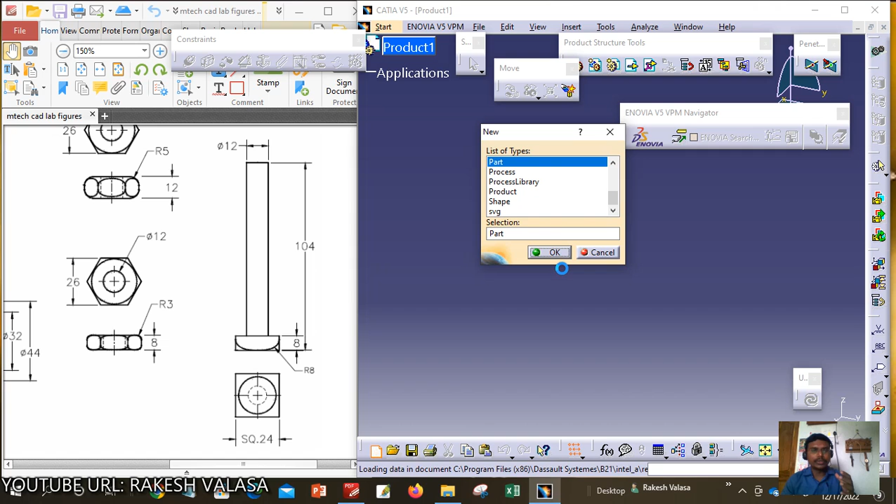Okay, let us start with CATIA V5 software file. Let us open a new CATIA file. From the list of types, you can choose part, then click OK. Now the new part drawing is activated. On the left side, it's showing different types of planes. Among these planes, now I'm choosing the XY plane.

XY plane shows top view of the given part. Now I'm going to choose XY plane. First I'm going to construct this bolt. You can see here at the bottom we have a rectangle, a square. The square dimensions are 24 mm. So I am choosing XY plane, then click on sketch tool. Now the isometric plane is converted into orthographic plane. When you click on sketch tool, the 2D tools are activated.

From the profile toolbar, I am choosing center rectangle. Now apply the dimensions. This is the square bolt, so all dimensions are equal. This length is 24. Next, again give the dimension to this side. This is also 24. Then click OK.

Now exit from this workbench. This square width is 8 mm. With the help of pad tool, apply the width. The width is 8 mm. Then click OK.

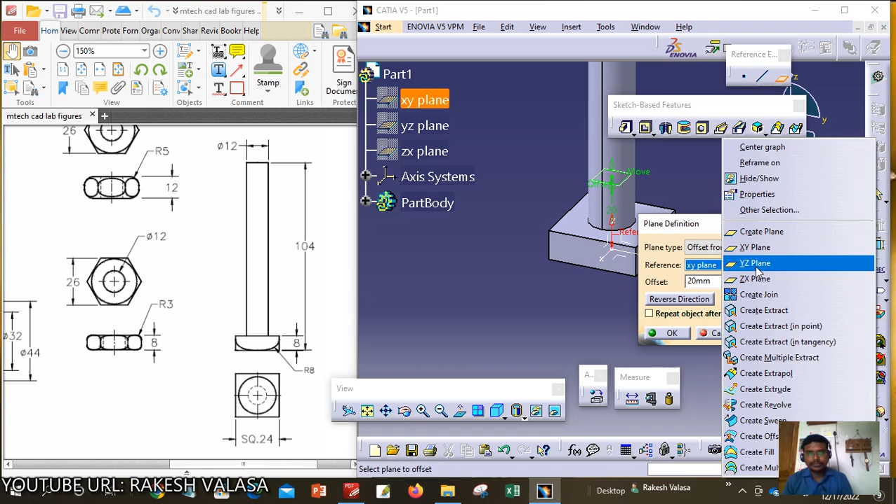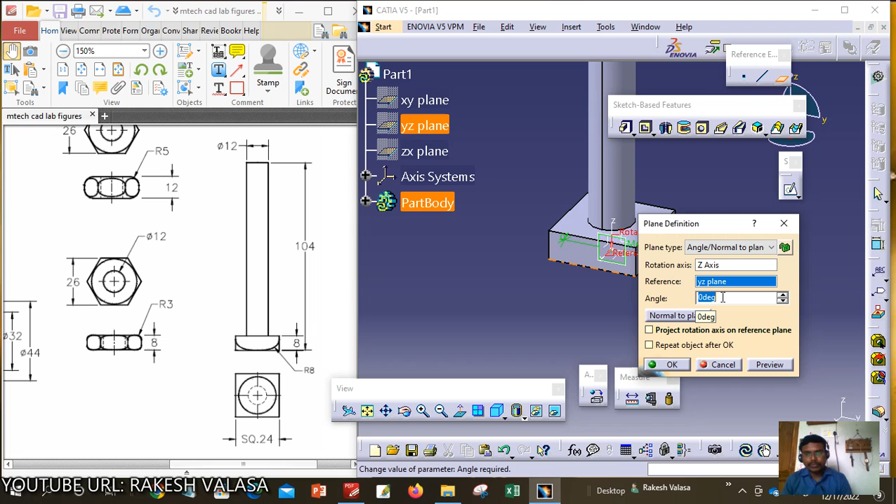I'm choosing YZ plane. Next, from plane type, here I am choosing angle or normal to plane, because this profile appears with rotation with the Z axis. The rotation angle is 45 degrees. This square solid is equally inclined to this surface, so that's why I am entering that angle as 45 degrees. 4-5, enter, then click OK.

On that plane we need to create this type of profile. So for the sketch tool, I am choosing position sketch. Here I am choosing this plane, then click OK. You can see here, in the previous step when creating the plane, that plane is parallel to YZ plane. When you are choosing plane type angle/normal to plane with respect to Z axis and adding the angle, that plane becomes parallel to that surface.

Okay, on that plane I am going to construct this type of profile. Now I'm going to create this profile on this surface. For that purpose, I'm going to project these two sides with the help of project 3D element, this edge and this vertical edge. Now I'm going to construct this profile with the help of the profile tool. When you choose the profile tool, it shows three different options. In that three options, I am choosing 3-point arc. This edge is the first point, second point, and this is the end point. Then click OK, then click Escape.

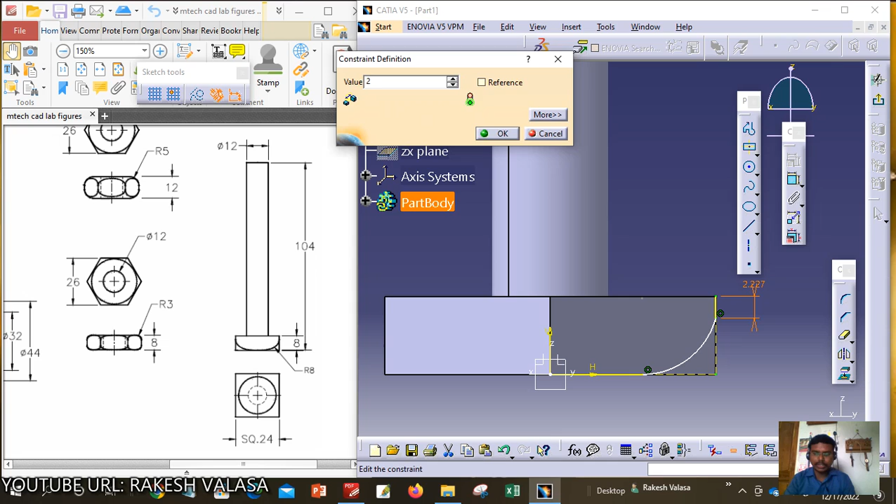Now give the dimension for the remaining length with the help of the constraint tool. This is the starting point, this edge. Let us assume this length is 2 mm. Then click OK. Now give the dimension to this radius. The curve radius is 8 mm. Select this radius, now change the dimension to 8 mm. For full constraint, you need to coincide this radius center point and this edge.

This circle, this radius center point and this edge—a small distance is there, so you can click the mouse right button, then choose coincide. Now this arc, our curve, is fully constrained with respect to this edge.

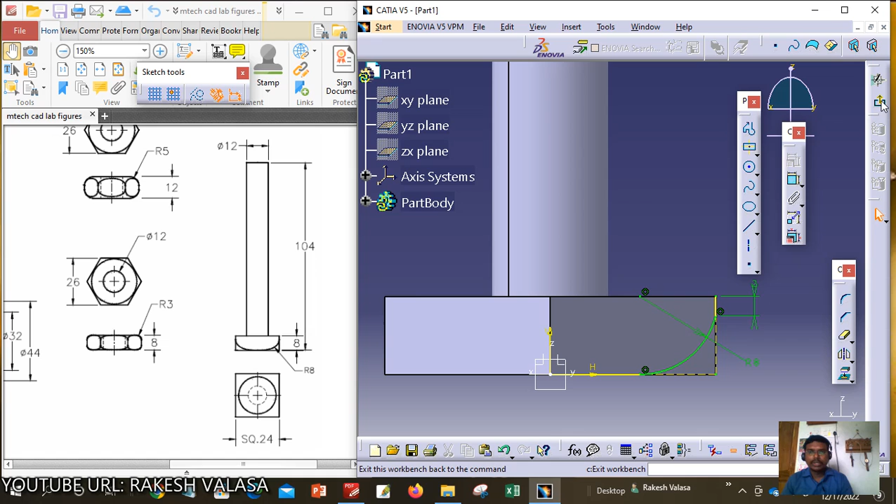Now exit from this workbench. From the sketch-based features, you can apply the groove tool for removing the unwanted 3D portion from the sketch.

Now I'm going to choose groove. Axis selection is with respect to Z axis, because we have already drawn this 3D model in the XY plane, that is in the top view, so you can remove it with respect to Z axis.

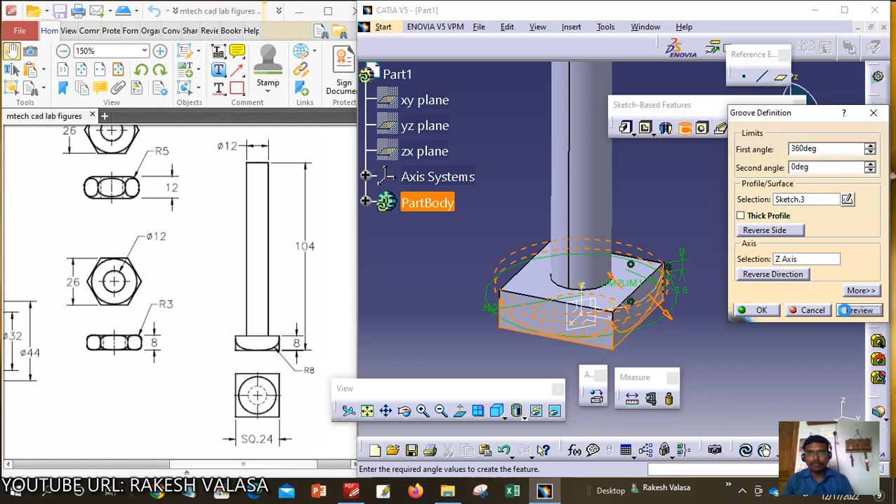Here, choose reverse side. Reverse side means you can remove the excess metal to the outside. Then click preview, click OK. This is the procedure to construct the plummer block bolt in CATIA V5 software.

Now save this file, Ctrl+S. Desktop, CATIA. The part name is plummer block bolt. Then click save.

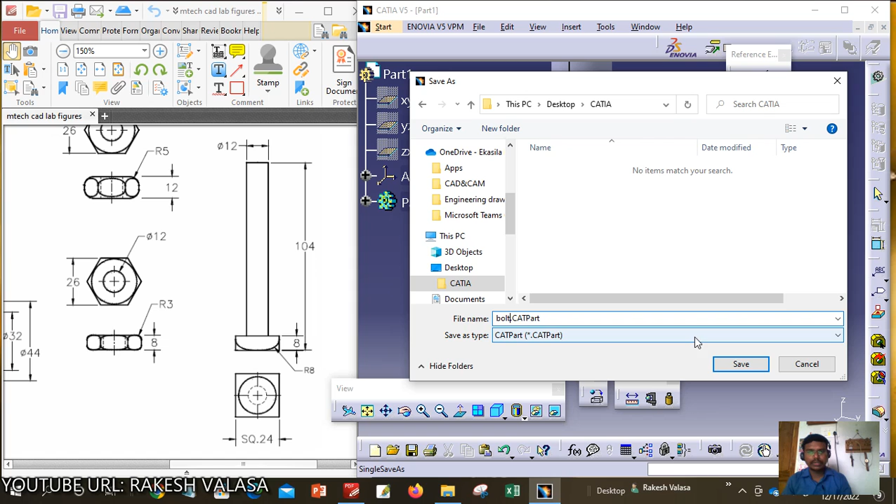The second one is this nut, the hex nut. For constructing this hexagon nut, I'm going to create one more new file, part drawing, then click OK.

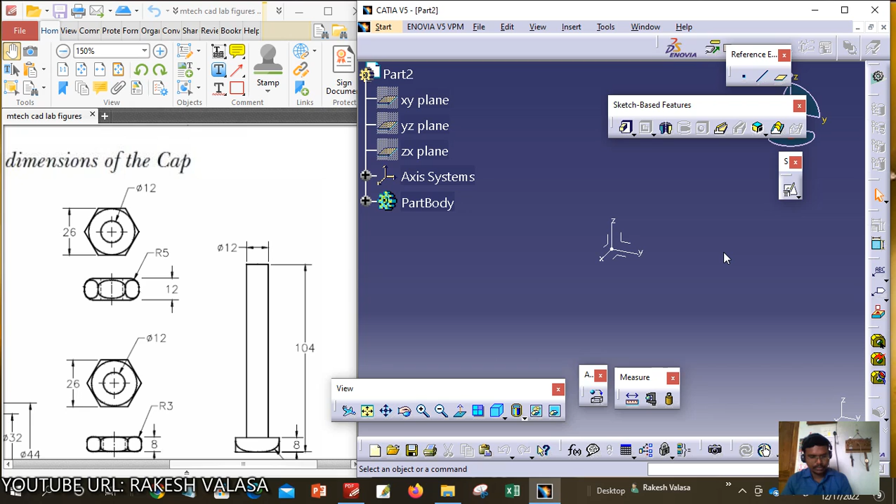Now I'm going to choose XY plane, sketch. You can see here in the top view it's showing like one hexagon. You can select hexagon from the profile toolbar. Select or click to define the hexagon center, then drag to horizontal.

Now apply the constraint. You can see here the distance between any two parallel lines, the length is 26 mm. Now I'm going to choose this edge and this edge. This length is 26 mm.

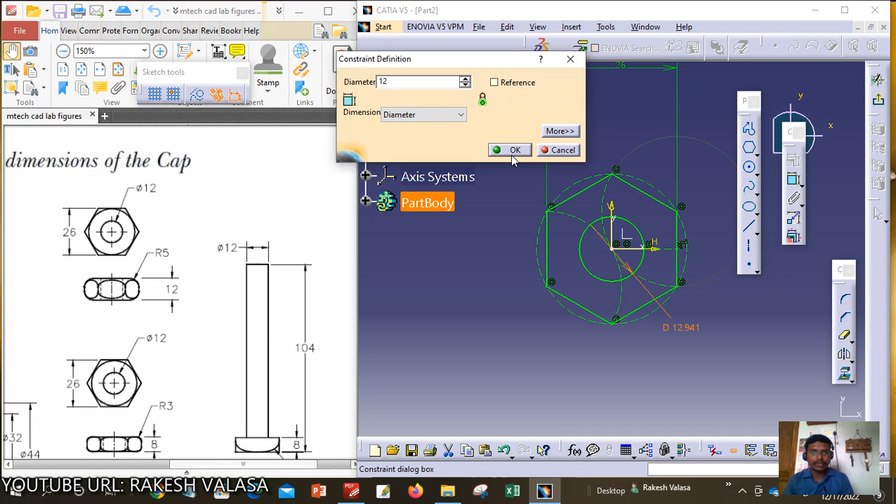Now in the middle, one circle is there. With the help of the circle tool, construct one circle and apply the constraints. The circle diameter is 12 mm. Then click OK. Now exit from this workbench.

Apply the pad. The pad width is 12 mm, enter length 12 mm, then click OK. After completion of this sketch, next you have to create this profile.

Go to the sketch, position sketch. Here the reference plane is selected. Sketch positioning is YZ plane.

Here we have already drawn this top view in the XY plane, so you can create this profile in another plane, that is the front view plane. You can see this view in front view, so that's why I'm choosing the YZ plane. Then click OK. You can see here this is the front view of the given model.

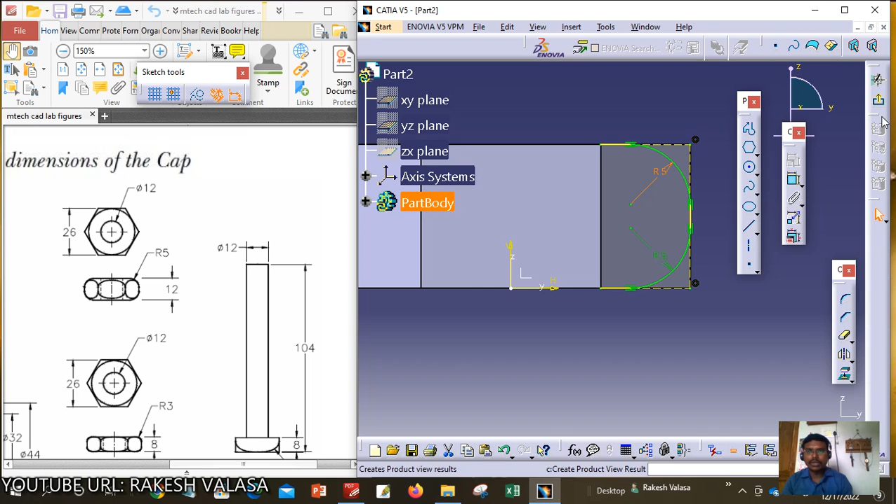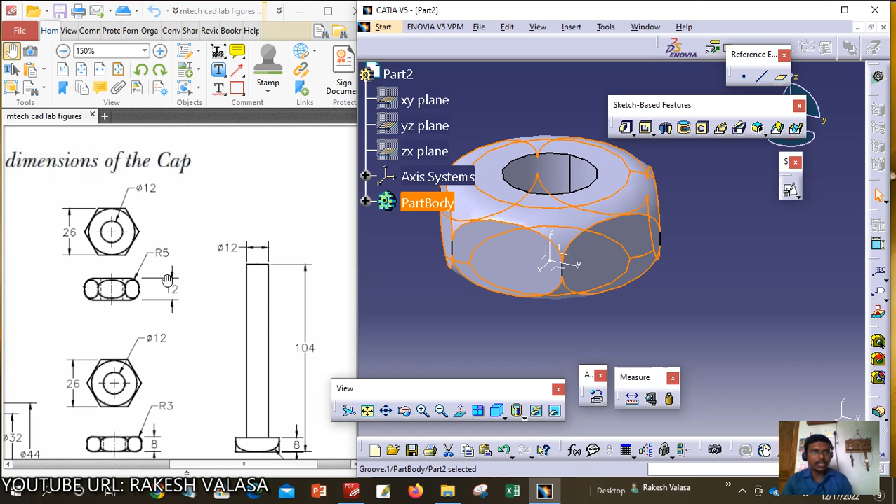Apply the groove. The selection is axis selection, Z axis. Reverse side, click preview, then click OK. This is the procedure to construct the 12 mm width hexagonal nut of the plummer block in CATIA V5 software.

Now save this file, Ctrl+S. This is the 12 mm hexagonal nut, 12 mm. Save.

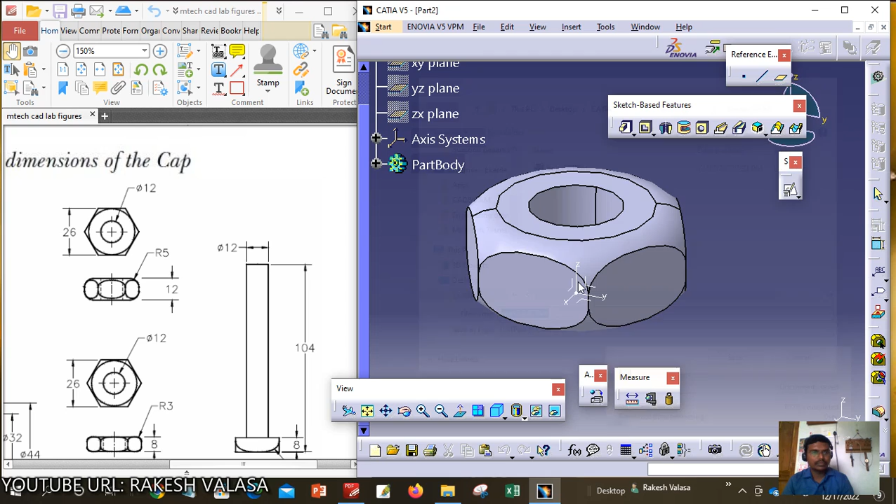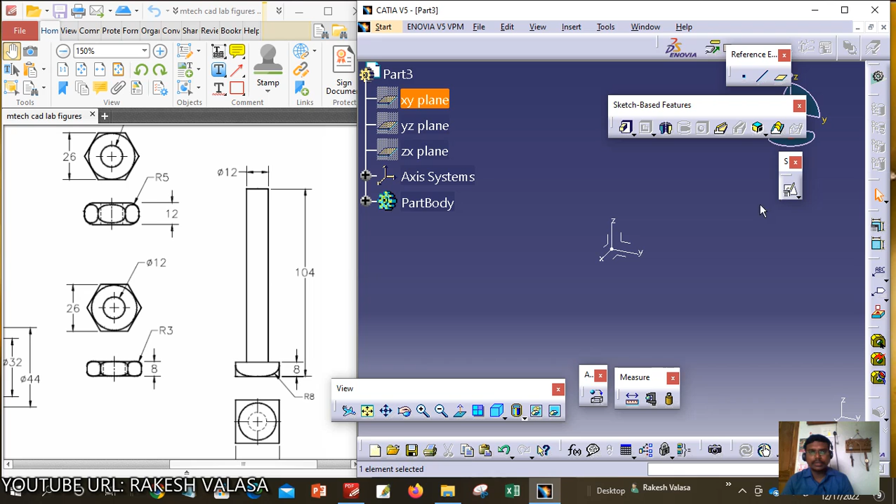Similarly, we have to construct the third model, that is the 8 mm width hexagonal nut. File, new, part. I am choosing XY plane. Click sketch tool. With the help of the hexagon tool, you can select hexagon from the profile toolbar.

Now apply the constraints. This edge and this edge, distance is 26 mm. In the middle, one circle is there. Draw the circle at the middle and apply the dimension, that is circle diameter is 12 mm.

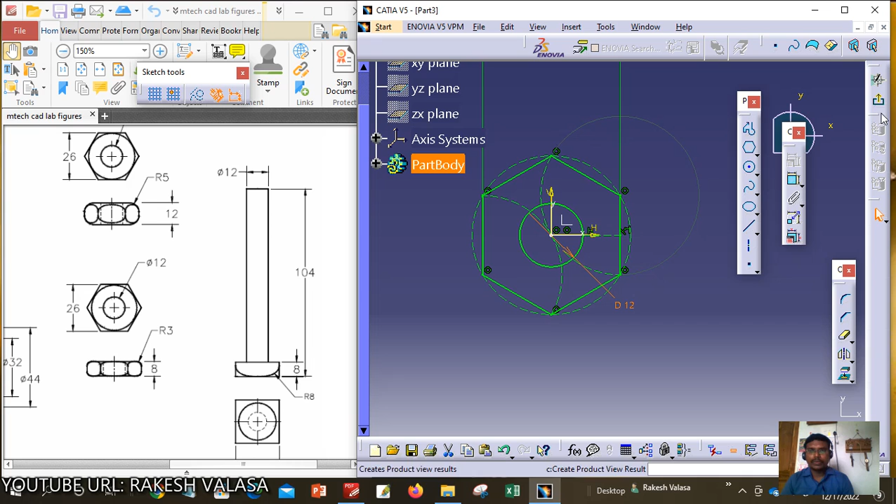Now exit from this workbench, apply the pad. The pad width is 8 mm. Previously we had taken 12 mm; now we are taking 8 mm.

Now go to the position sketch, select the YZ plane, then click OK. At both corners, one curve is there, the curve radius is 3 mm.

Now project 3D, with the help of project 3D elements, extract edges from this 3D element: this edge, vertical edge, and this horizontal edge. With the help of the corner tool, create corners at both edges, this one and this one.

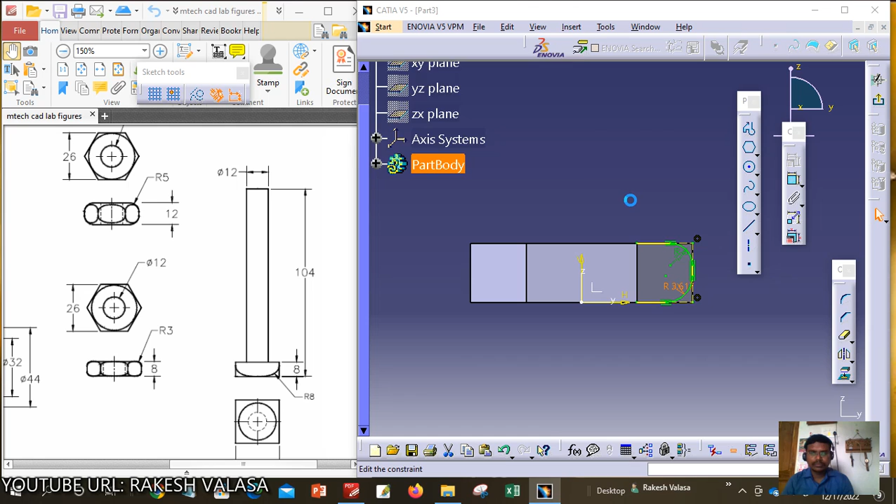Apply the constraints, that is 3 mm. This is also 3 mm. Now exit from this workbench.

Apply the groove. Selection is axis selection with respect to Z axis. Apply to reverse side, then click preview, click OK. This is the procedure to construct the 8 mm width hexagonal nut of the plummer block.

Now save this file. Nut, 8 mm. Save.

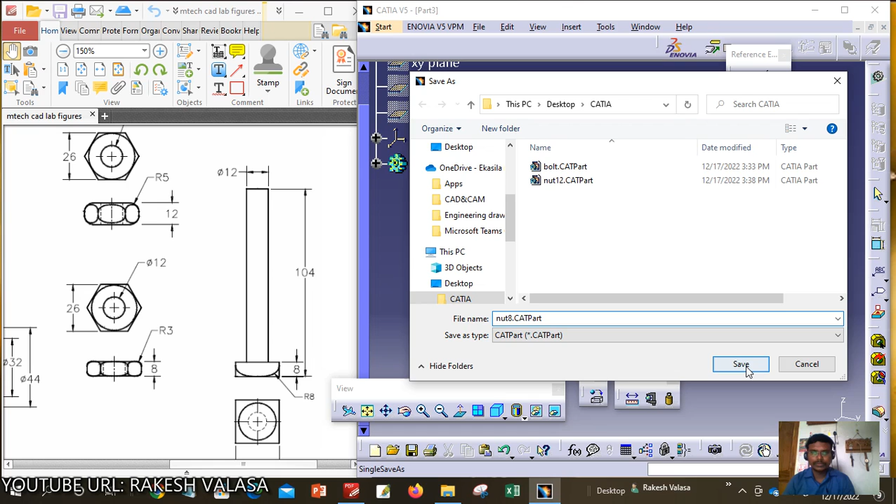I hope this is very clear to everyone.